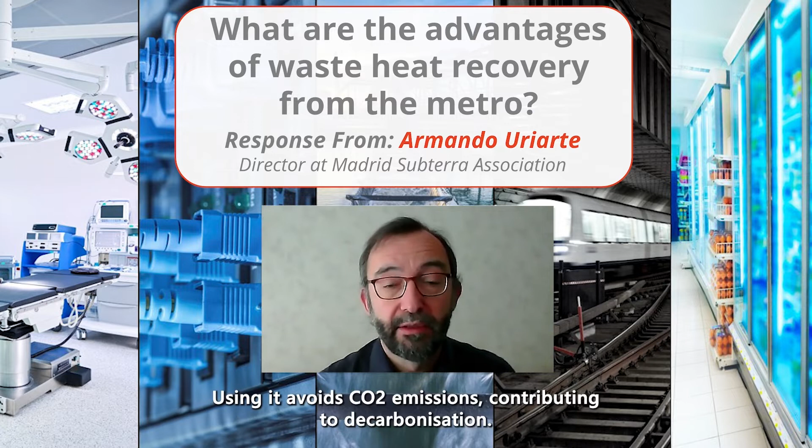The advantages of using this heat are very interesting. First, we are using an energy which is normally disregarded, so we're talking about energy efficiency. Second, this is a local and distributed energy that helps reduce energy dependency in cities. It is a clean energy as well; using it avoids CO2 emissions, contributing to decarbonization. And finally, we use heat which is thrown into the atmosphere, so we avoid thermal stress and the heat island effect. Based on these aspects, we believe metro heat recovery can be a very useful energy vector for the future.

Thank you. I will share the experiences we had. I will tell you about the challenges and the lessons learned. I think the lessons learned are one of the most important things here.

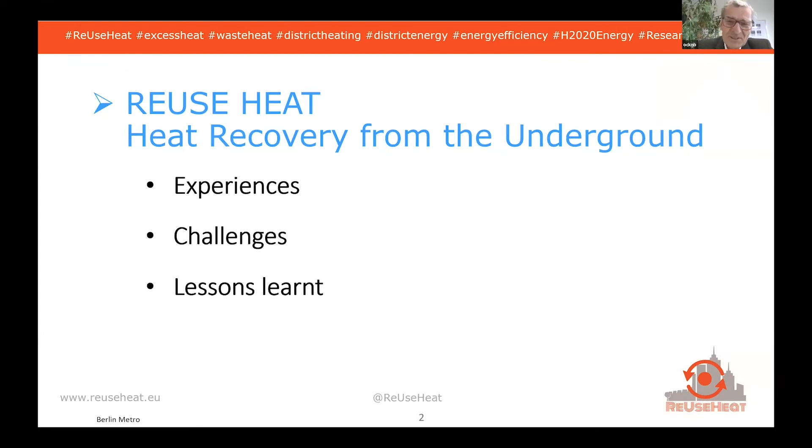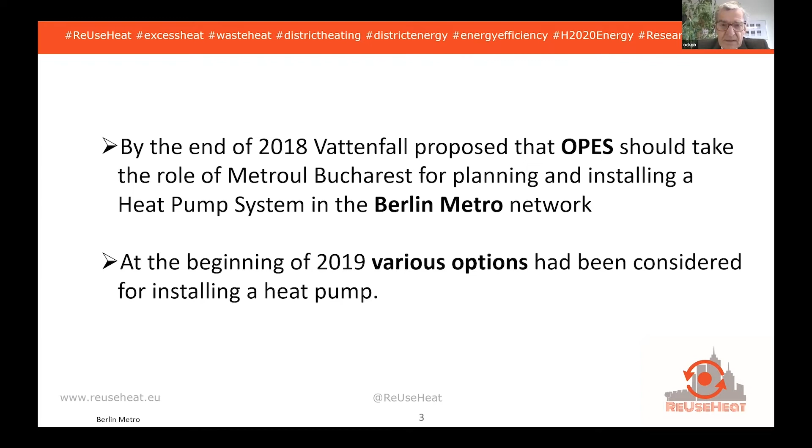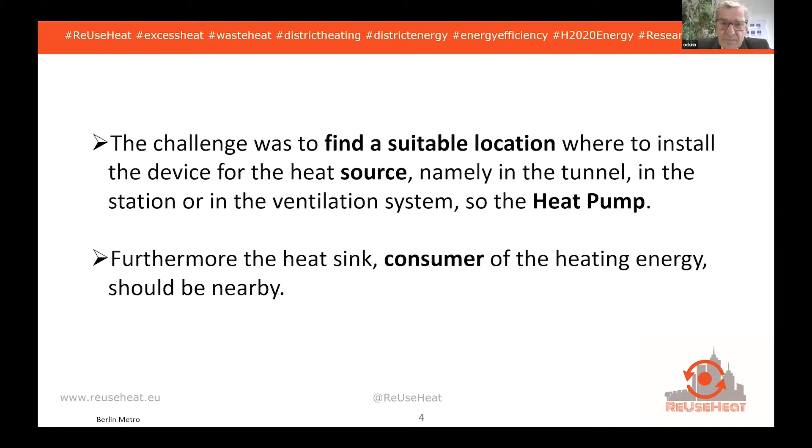It was not easy. By the end of 2018, Vattenfall proposed that OPES take the role of the Bucharest metro system, because Bucharest metro quit our project, and we were supposed to find a place in the Berlin metro system where we could install a heat pump. We visited many stations and tunnels to look for a suitable location for the heat source and, of course, a nearby heat user. We then found the first most suitable location at Ernst-Reuter-Platz, marked here in yellow on the map of Berlin.

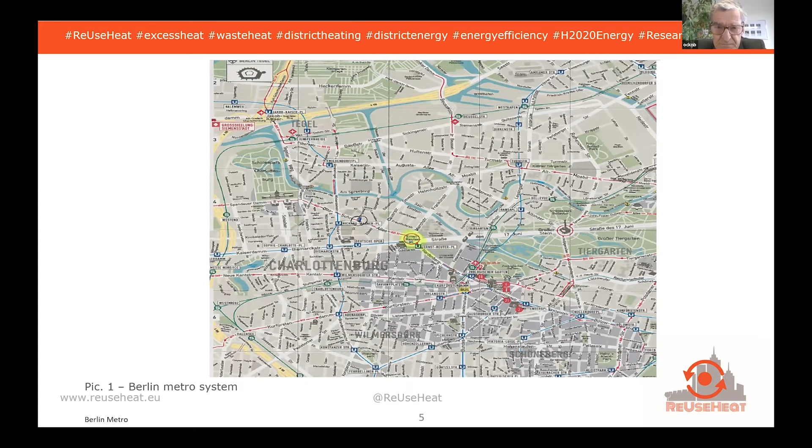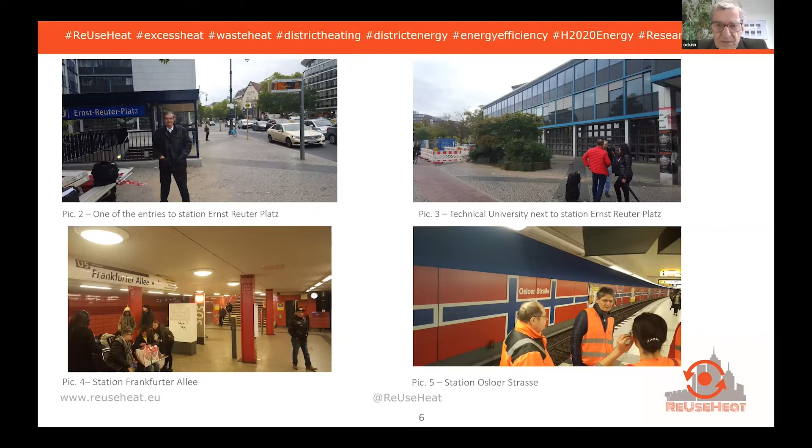At the left-hand side, you see the entrance, the main entrance at Ernst-Reuter-Platz. At the right-hand side, you see the university, the technical university, where we would have been able to supply the energy to. We have also visited some other locations, Frankfurter Allee, left below, or Osloer Straße. But at these locations, it has been more difficult to find heat users. So we decided, yes, we go to Ernst-Reuter-Platz and we make the design of the system there.

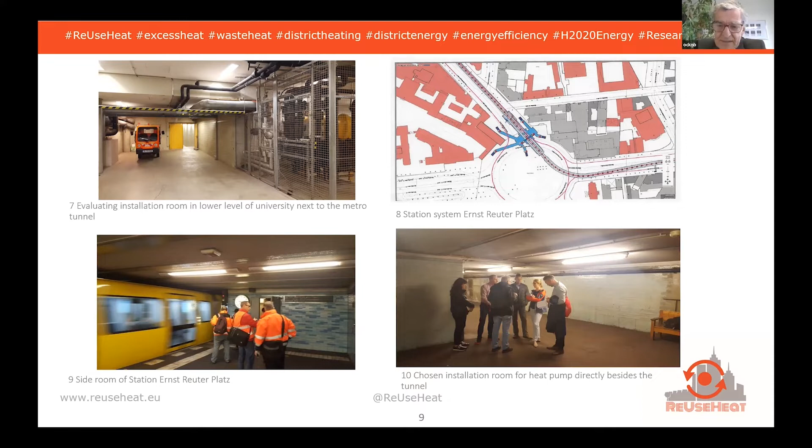Here you see the system of Ernst-Reuter-Platz. Gray is the station area where passengers board the trains. And at the right-hand side, you see a side room with a blue cross. There we found the most suitable positioning for the heat pump.

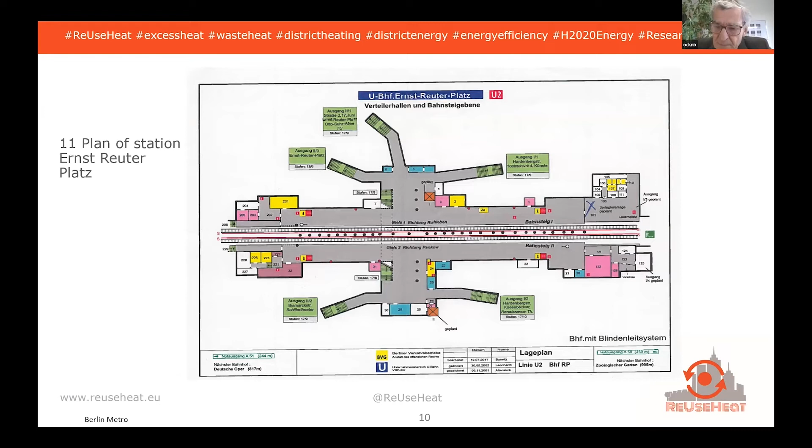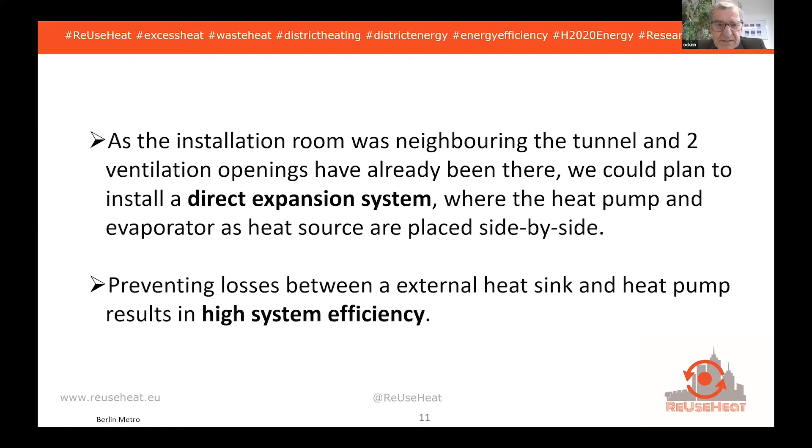And this room was directly neighboring the rails. And so we would have no distance between the heat absorbing unit of the heat pump and the heat pump itself. That's why we could use a direct expansion system.

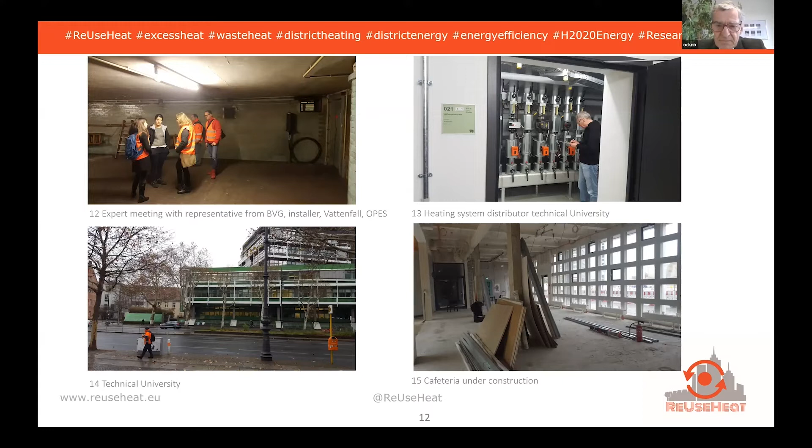At the bottom left, you see part of the university where the Mensa is, and the Mensa would have needed heat all the year round. That means 8,000 operating hours. Excellent, excellent results. But then the distance has been too long for this room, so it was considered to heat the cafeteria at the bottom right, which was under construction, but there we would only have been able to supply heat for 2,000 hours a year.

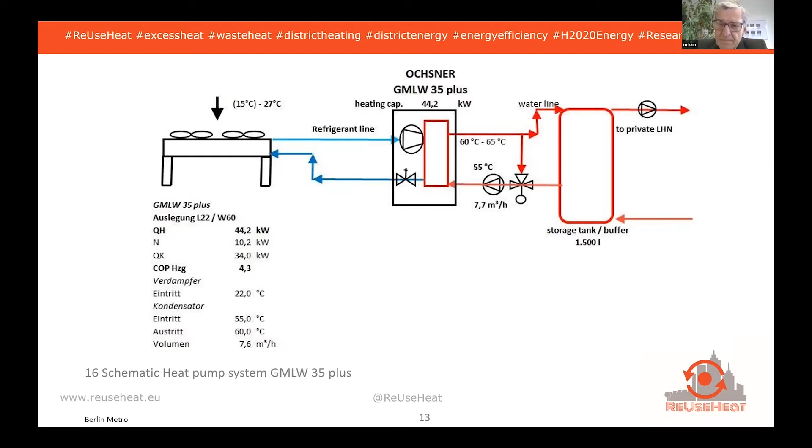Here you see the sketch of the heat pump system planned and designed. At left-hand side, the evaporator, the fan coil, where the heat is absorbed. Then in blue, the refrigerant line between the fan coil and the heat pump itself. At the right-hand side, you see the hot side of the heat pump with the buffer tank, a storage tank, from which the heating system or the heating grid would have been fed.

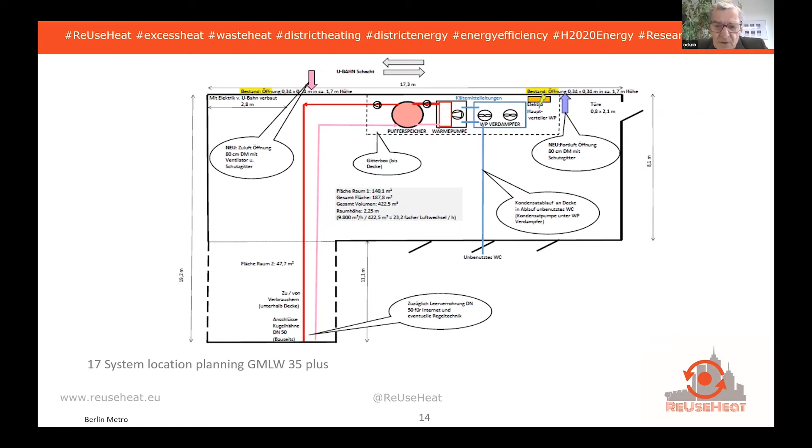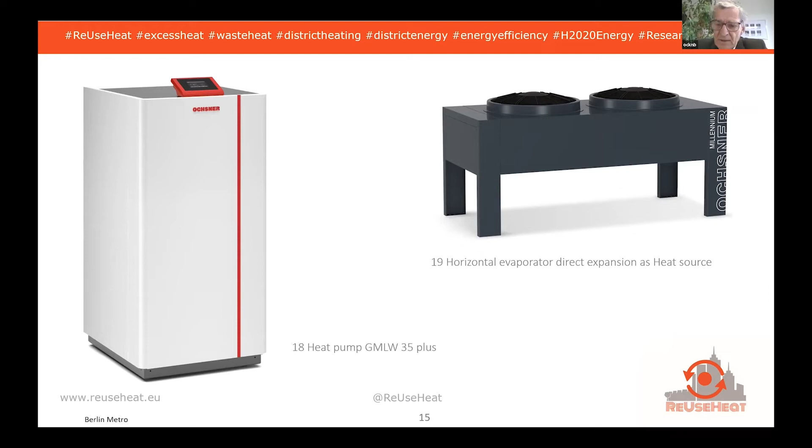Yeah, after we have designed everything and contract ready with the installer, the prices, the details of the designs, and so on, were assumed. And just before we could place the order, we got the message from the BVG, from the runner of the metro system, that we cannot proceed because a new staircase was built, and they need this room.

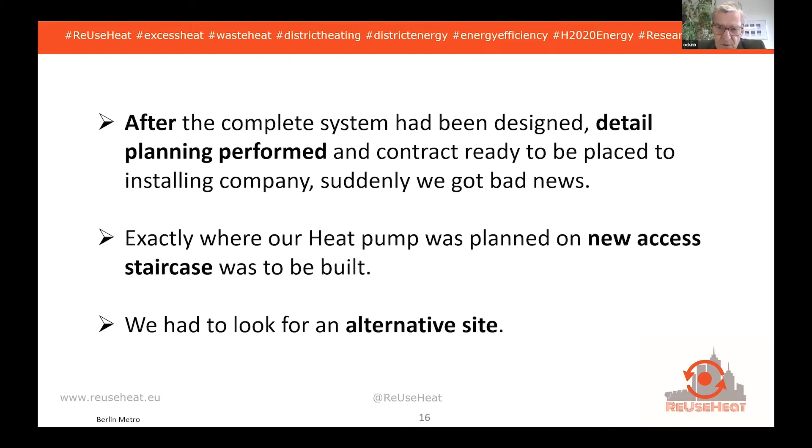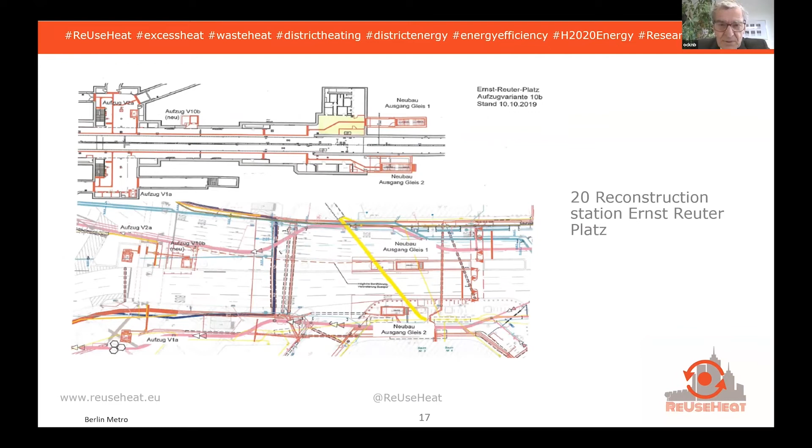Here you see their new planning in yellow at the top. The upper picture, you see the yellow room. That's where the heat pump should have been installed, and a new staircase, Neubauausgang Gleis 1, a new staircase. So they needed this room here, and we had to look for a new, different location. We looked at, for instance, Friedrichstraße. Friedrichstraße is where the border was between East and West Germany at ancient times.

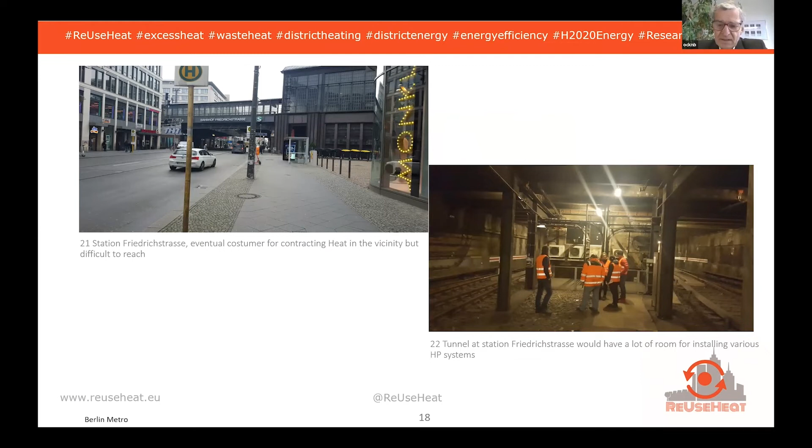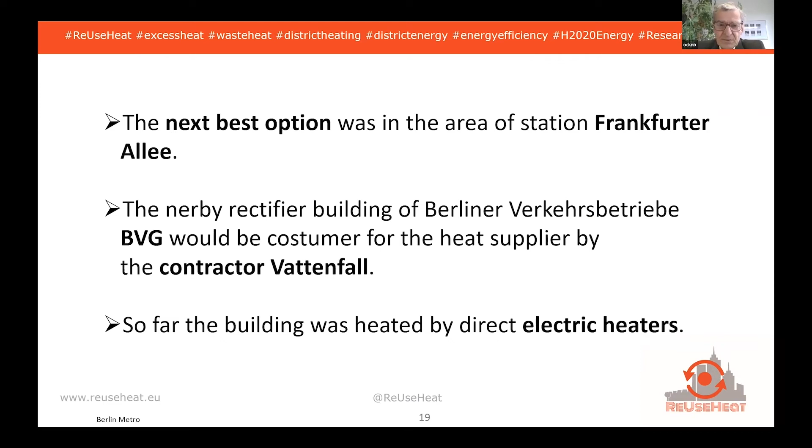Here we could have installed the heat pump easily. You see at the right-hand side, in between the rails, a lot of space, but there was the problem where to supply the heat to. And that's why we went to Frankfurter Allee, and we found, okay, the Frankfurter Allee, the second best option. Because there we had someone who wanted to use the heat, the BVG itself, the Berliner Verkehrsbetriebe themselves, because they heated their building, the rectifier building, up till now just with electricity, with direct electric heaters.

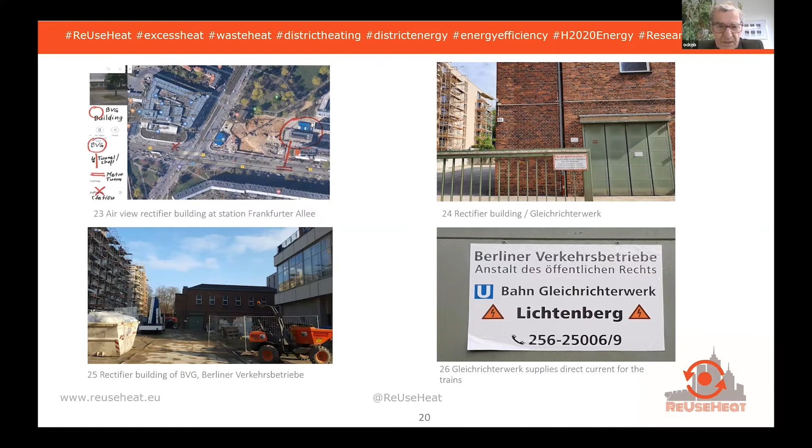Here you see an air view: in the red circle, the rectifier building, and the 100-meter distance to the rails just located below the road. The right-hand side, also the entrance of the rectifier building. And here, again, two more views of the rectifier building itself. At the left-hand side, you see the lower level, where the connection tunnel between the rails, the rail track itself, and the building was conducted. A tunnel more than 100 meters long.

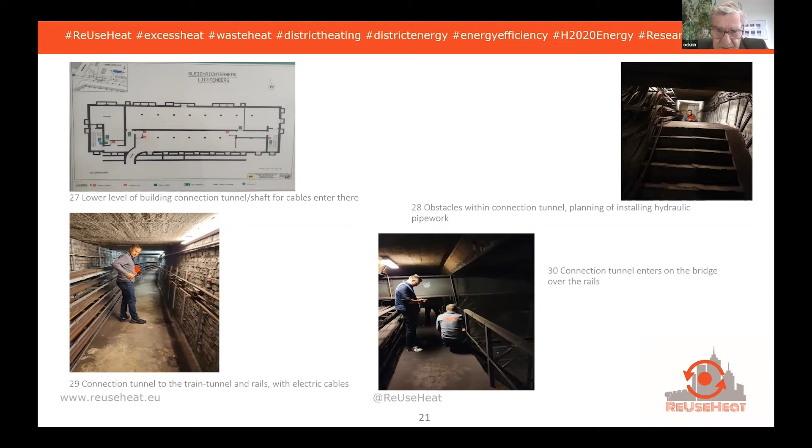You see here, it is a very small tunnel with the cables supplying the direct electricity to the trains, the rails. Here you see the location between the rails where the fan coil was to be installed to collect the ambient heat, the heat from the tunnel. And at the right-hand side, you see again the tunnel and all these fire protection walls and doors in the tunnels. So the planning was really not easy, and many, let us say, challenges had to be met and solved.

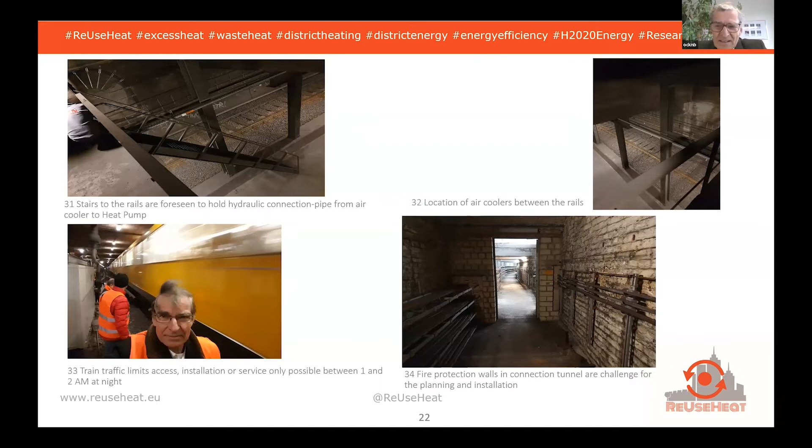At the left-hand side, you see the problem that there is always train traffic, of course, and to the spot where the fan coil would have been installed, there was access only permitted between 1 and 2 a.m. during the night, with 3 different supervising persons from 3 different security departments of the metro operator. So I need not tell you how difficult it is to install a system when you go directly to where the rails are.

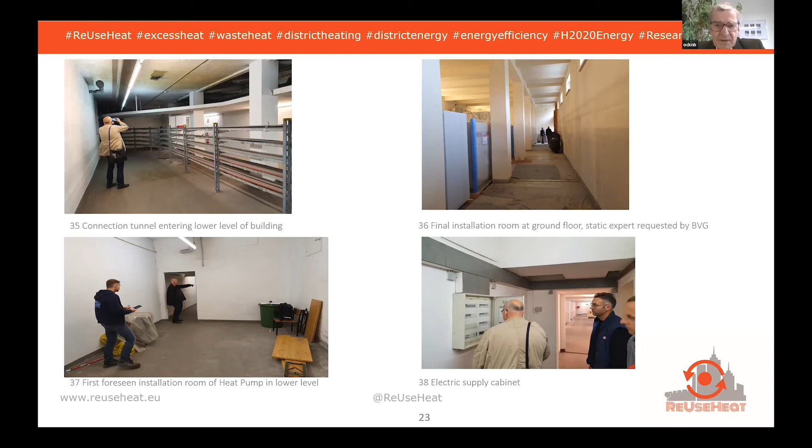But in spite of the fact that the heat pump would have less weight, they obligated us to ask a consultant to make a complete static calculation of whether it is feasible to install the heat pump there. That means more and more regulations came, so this delayed, of course, the planning work. And we did not get all these, let us say, restrictions at the beginning of the planning, but only step by step. This was not easy.

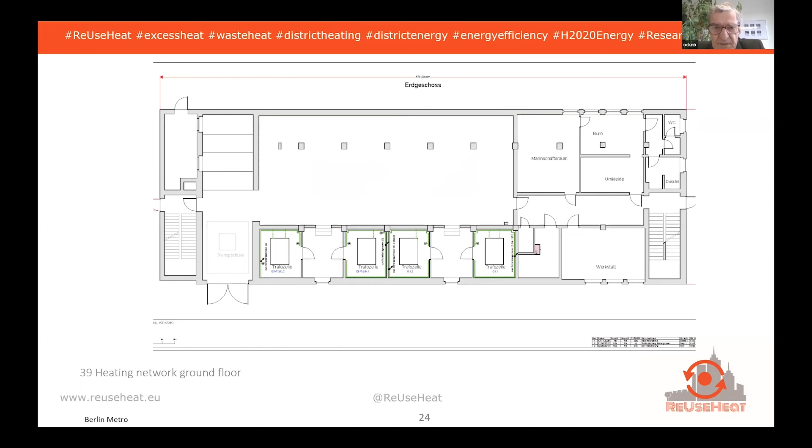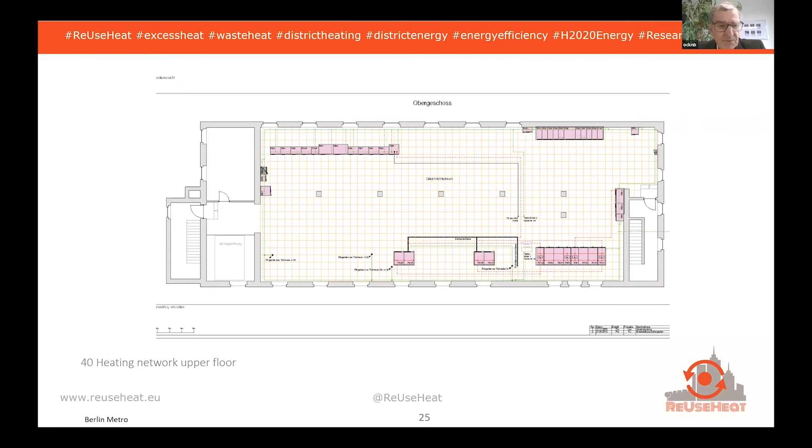This is the ground floor, which would have been heated from the rectifier building. And this is the upper floor, which would have been heated with a new system of hydraulic heating with radiators. Here you see also at the left top this upper room. And here you see the electric heaters. There were several electric heaters with a capacity of 20 kilowatt. Of course, a bit of a waste of energy when you use direct electric heat instead of grading it up with a heat pump.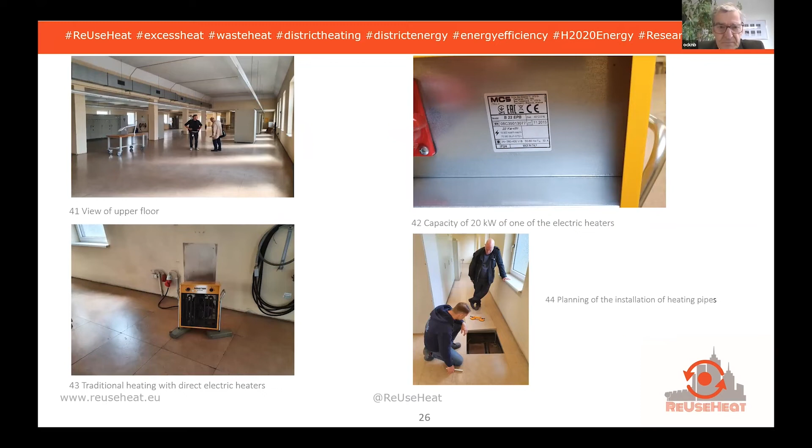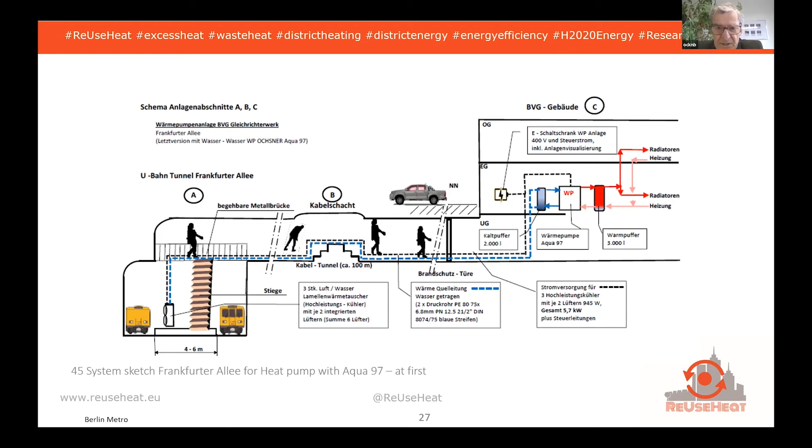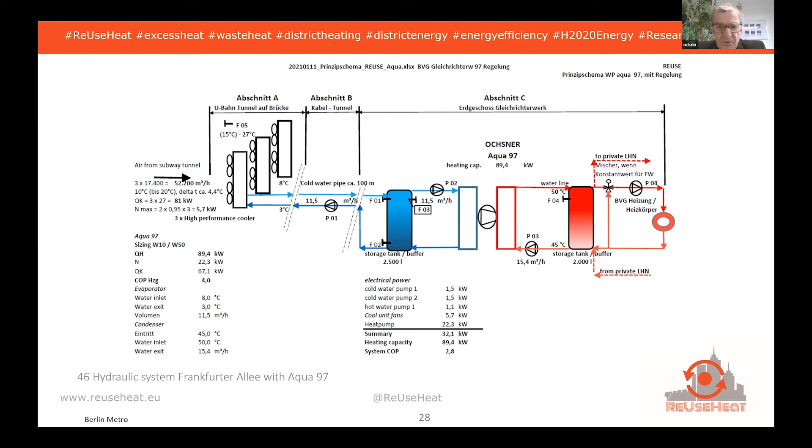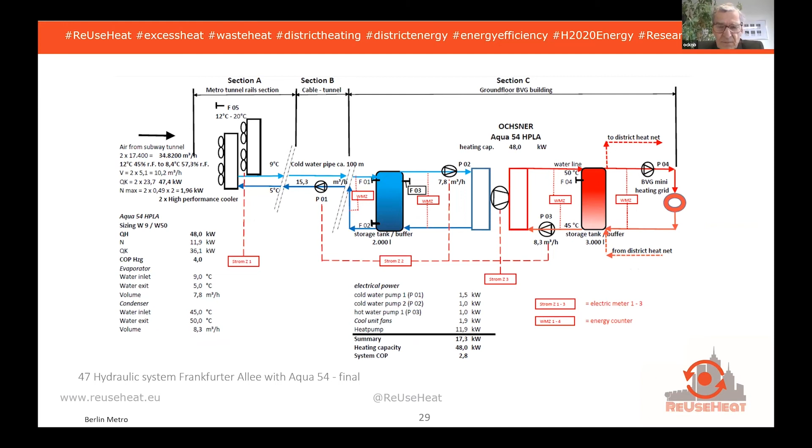At first, Vattenfall said, yeah, we make a contract with the neighboring building too, and we need more heat than just for the rectifier building. That's why we planned an Aqua 97 machine with some 89 kilowatt heating capacity. After a couple of months, we were informed, no, we will not supply the heat to the neighboring building, but only to the rectifier building of the metro operator. Then we replanned a new system with the Aqua 54, only 48 kilowatt, to heat the building itself.

The lessons learned: we had the problem that the responsible personnel within the metro operator and also the heat supplier, the contractor, in this case Vattenfall, changed during the planning period several times. So it was difficult to communicate, and this delayed, of course, the process.

The more surprising and the more difficult to overcome was the regulations and restrictions. We got step by step these restrictions and regulations from the metro operator, and we had all this to incorporate in the planning. And of course, this did increase costs, and delay in the planning, and also installation costs after all.

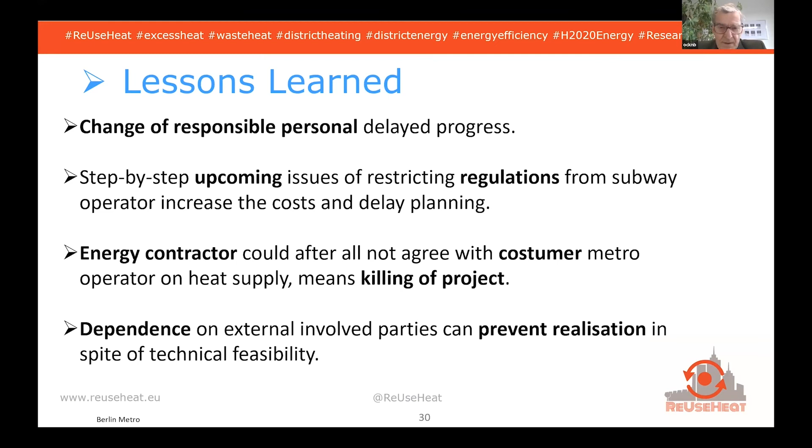Then the problem is that the energy contractor could not agree with the customer for a heat supply contract. And therefore, we could not proceed, and this was killing the project. The problem is, and you see at the bottom, the dependency on external parties, which do not from the beginning say, yes, we will need the system, we will need the heat, and so to be sure that the system will be installed.

The lessons learned is that with the two different cases, one at the Ernst-Reuter-Platz and one at Frankfurter Allee, these are two different systems. One is direct expansion and one is a water-to-water heat pump with an external fan coil as heat source. And we showed, because we did plan to the end, that we have several possibilities and technical systems to use the heat of the metro trains in the tunnels.

And of course, we can upgrade the system. The capacities we have planned are comparatively low. Why comparatively low? Because we had not much space to install larger systems, and we had no customers for more heat.

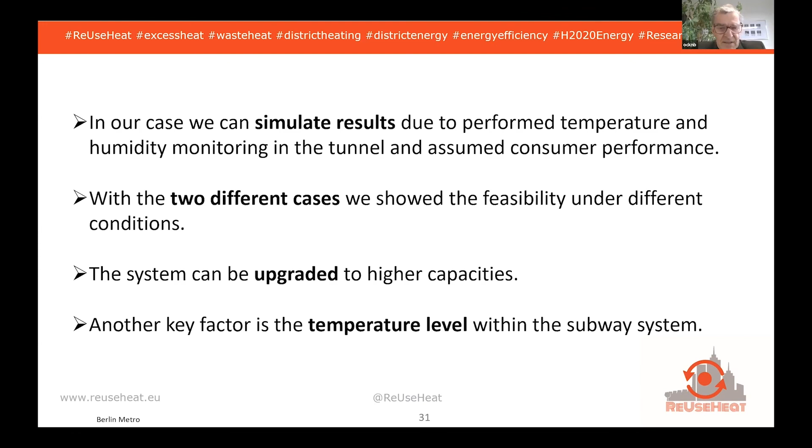Another key factor, of course, is the temperature level in the subway. For instance, in the London tube, we have much higher temperatures because the tunnels are much deeper in the ground, and the rock cannot absorb anymore the heat from the trains and from the passengers. And therefore, a lot of energy is needed and a lot of air exchange is needed to cool the stations. Here, it would be very important and also very efficient to use this high tunnel temperature for a heat pump.

Hello, I'm Rodrigo Matabuena. I'm the Energy Capital Projects Manager of Islington, and I've been involved over the last 4 years in the Bunhill 2 project, which is the extension of the existing Bunhill network in Islington. This extension is now taking heat from the London Underground, from a disused station of the London Underground. And this project has been really successful in many ways, and we're very pleased of having this project.

Two of the key elements of success of this project have been, one, the institutional and political backup. Without this political backup, it would have been impossible. It has taken us a long time to deliver, from conception till operation. It's almost a decade. So without this political and institutional backup, it's pretty much impossible to drive this project forward.

The other element that I will mention is having a very well-defined governance structure within the organization and the project management team delivering the project. It's very likely people will change throughout the life of the construction of a project like this. So that is really important.

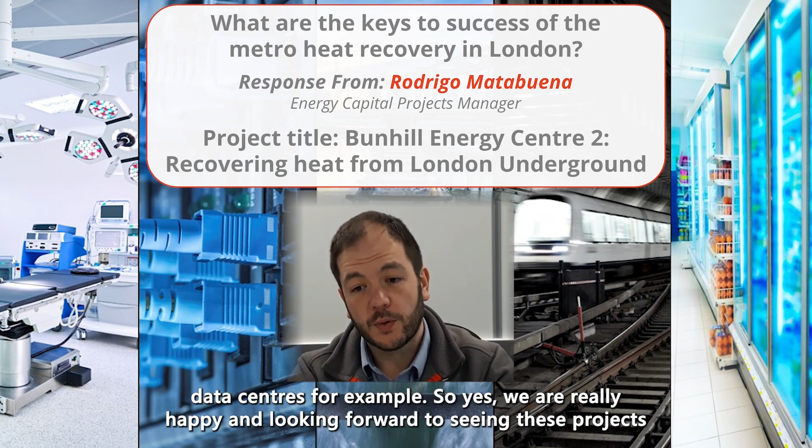And yes, we're rolling out this project. We're thinking about delivering the next stages, not only around Bunhill, but also new heat networks that are also taking heat from waste sources, not only the tube, but also data centers, for example. So yes, we're really happy, and we're definitely looking forward to see these projects around London, the UK, and Europe in general.

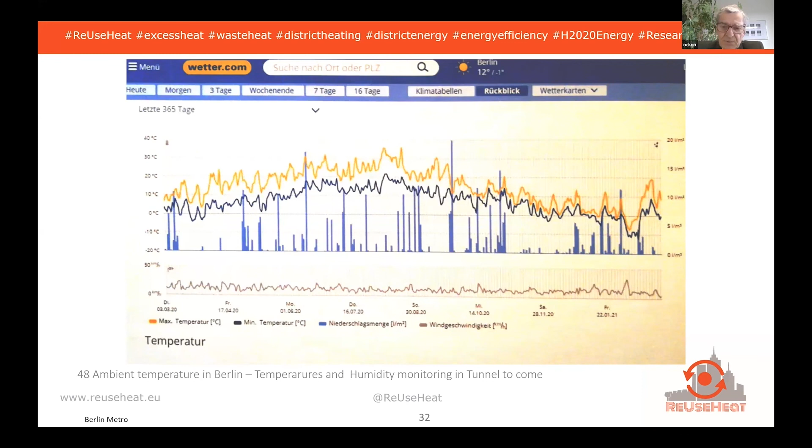This is the ambient temperature in Berlin, which also has, of course, an influence on the temperature in the tunnel and in the stations, because the metro system is not very deep in the ground. And the temperatures from monitoring we will get in the next weeks from the metro operator, and then we will also publish it. Thank you for your attention.